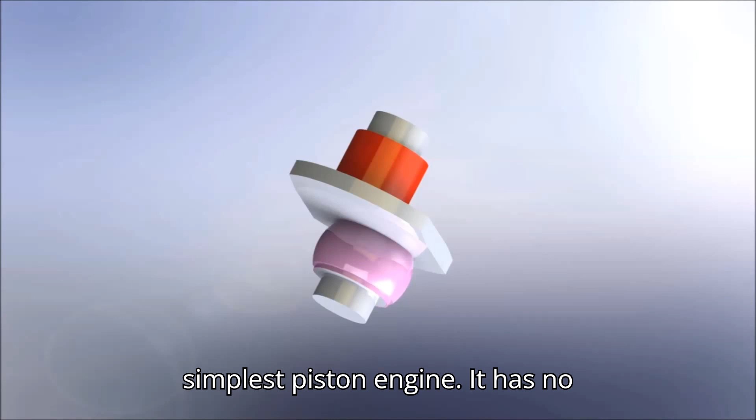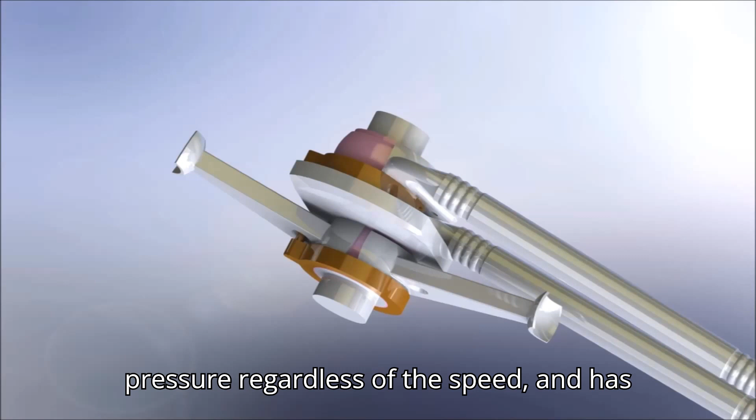The OPOC engine proposed by us is the simplest piston engine. It has no cylinder heads, no distribution, and it has only one motor shaft and one crank for each two opposite pistons. It is also mechanically supercharged, with constant pressure regardless of the speed, and has an oil bath for lubricating the moving parts.

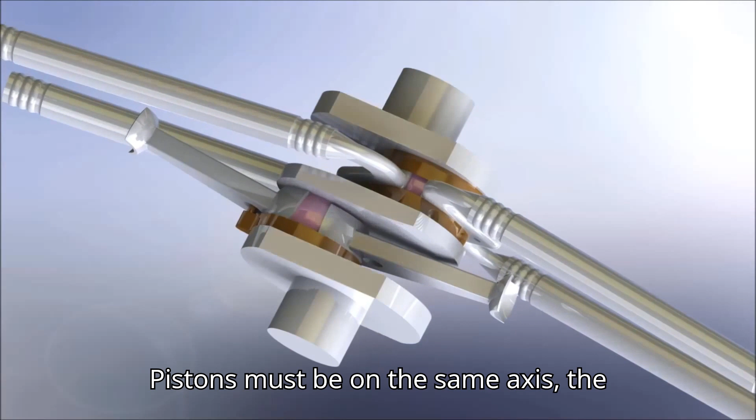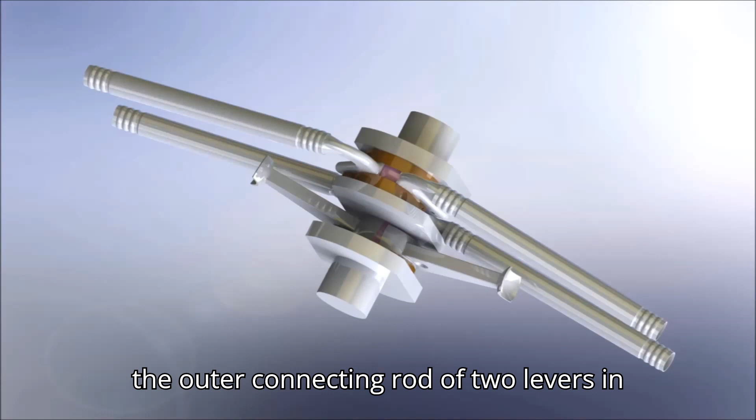Theoretically, this is not possible because the joints of the two opposite pistons must be on the same axis, the axis of the cylinder liner, and move in opposite directions. The solution was found by Professor Hofbauer by actuating the outer connecting rod of two levers in phase. It complicates the motor shaft a lot, and any oscillation of it leads to seizure.

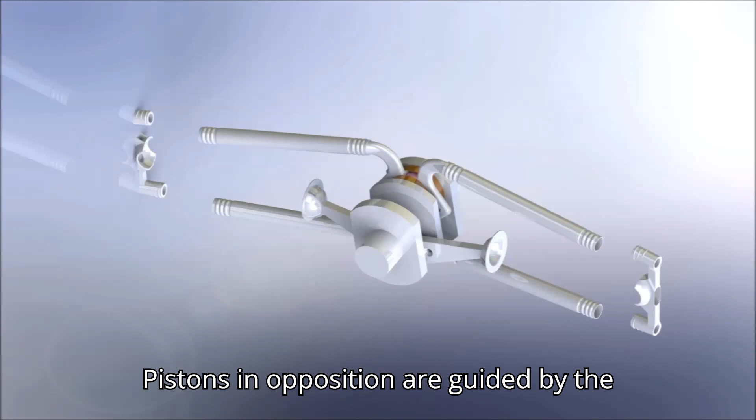By applying our invention called the spherical joint on membrane-type bodies, we found that the joints of the two pistons in opposition are guided by the cylinder liner permanently in the coaxial position, and can also move in opposition because of the connecting rods positioned inclined to the shaft axis. The engine can transmit energy through its own lever to the crankshaft.

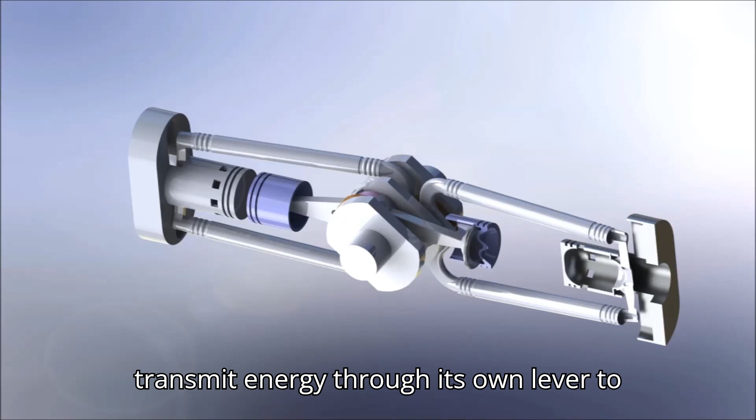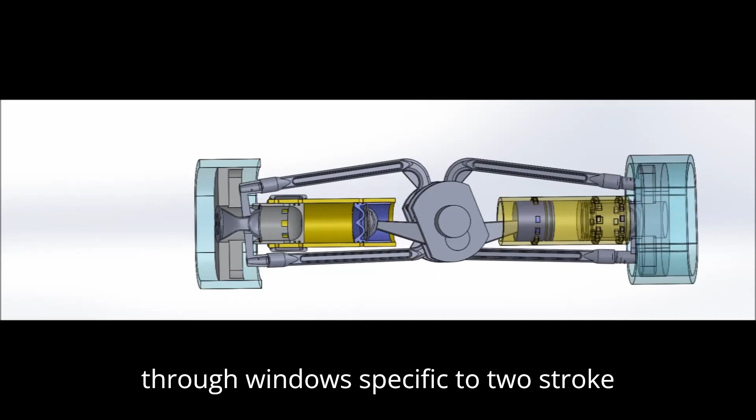We noticed something else, namely that the external piston can have a double effect and can simultaneously act as a compressor piston. The operation is safe and simple. The air is pushed from the compressor, directed through the external piston and through windows specific to two-stroke engines. It reaches the combustion chamber formed between the external piston and the internal piston.

The intake circuit is totally separate from the lubrication circuit. The exhaust gases can be used by a turbogenerator.

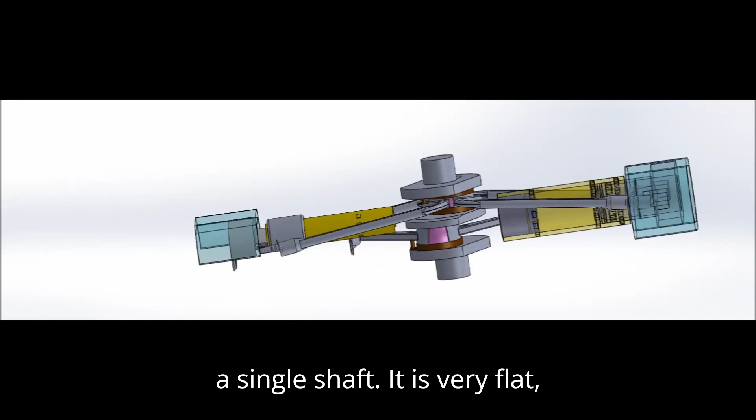It is a motor modular in length, as it allows the mounting of several modules on a single shaft. It is very flat so it can be placed anywhere. It is capable of very high energy densities per unit volume. It has all the qualities to be used as a propellant for military vehicles.

It is a propeller that does not have problems with seizing, because all the components are spherically articulated and forcefully lubricated.